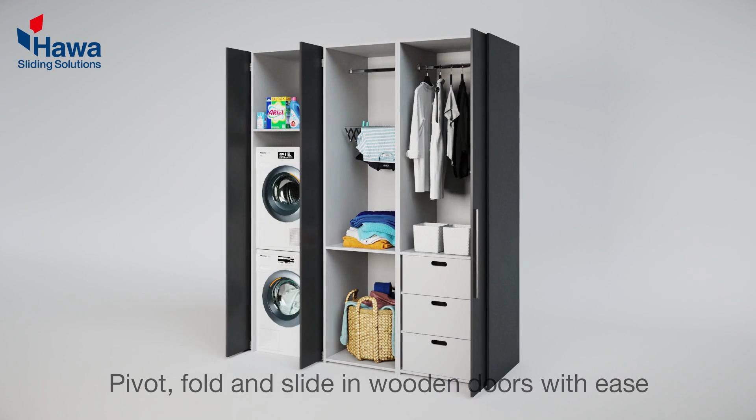Today, I'll provide an overview of the HAWA Concepta planning tool. Concepta is the flagship product from HAWA and comes in 4 options: Concepta 25, 30, 40 and 50. Concepta cabinets can be designed in 4 basic configurations, and you can use a number of different material types, and you can design for a wide range of installation heights, weights and cabinet depths.

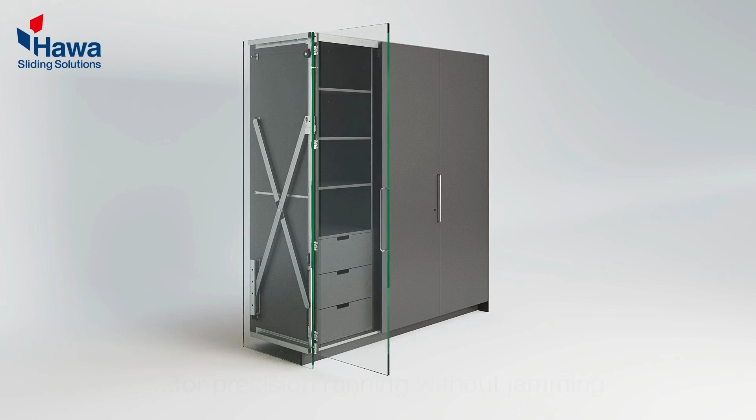The planning tool can help you to determine which version of the HAWA Concepta is suitable for your application, and it can assist you in calculating the cabinet dimensions, cut lengths for profiles and drilling locations for your project. It is internet-based and available in 3 languages: English, German and French.

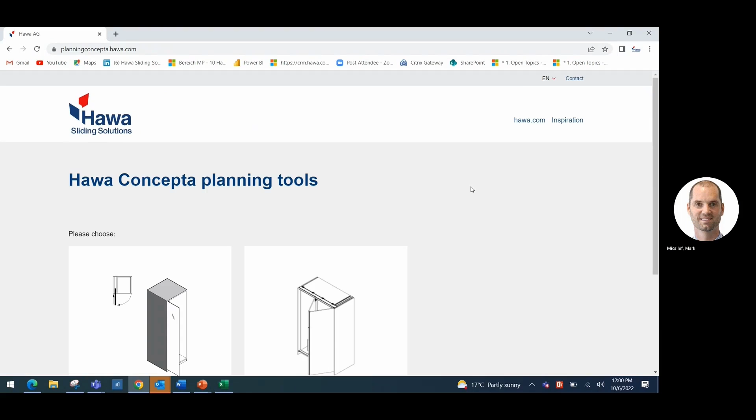To begin, open your browser to www.planningconcepta.hawa.com. The Start screen then displays 2 options: Concepta, which is the single door pivot and slide system from HAWA, and Folding Concepta, which is the folding and sliding system from HAWA. Today we will be focusing on planning a Concepta pivot and slide cabinet.

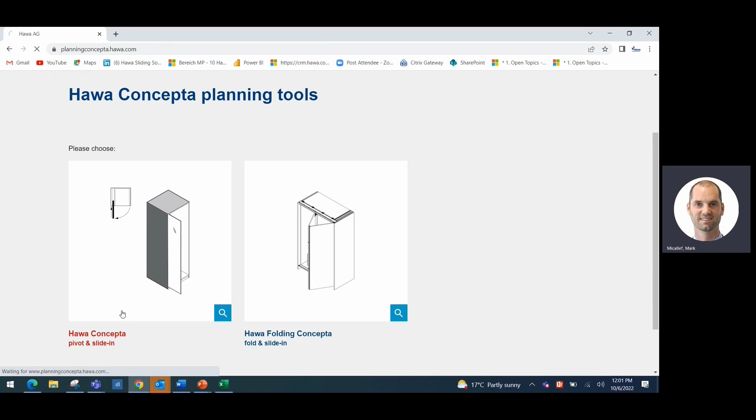When you select that icon, you will be directed to a new screen that asks if you are planning a Concepta with or without a soft close mechanism. HAWA upgraded all of its Concepta hinges to include soft closing capability back in 2020, and all new stock sold into Australia and New Zealand will have this new soft close hinge. If your product was purchased after November 2020, you will most likely have a soft close hinge as standard, but

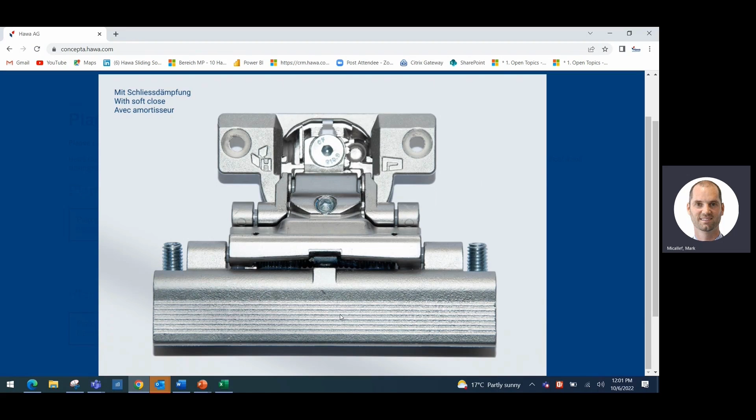if you're unsure, the magnifying glass adjacent to each of the options provides a picture of these hinges so that you can identify your exact hinge. Note that the soft close hinge contains these scribe lines on the outside of the hinge, whereas the non-soft closing version does not have those scribe lines. If you're still unsure, please contact your HAWA stockist to confirm.

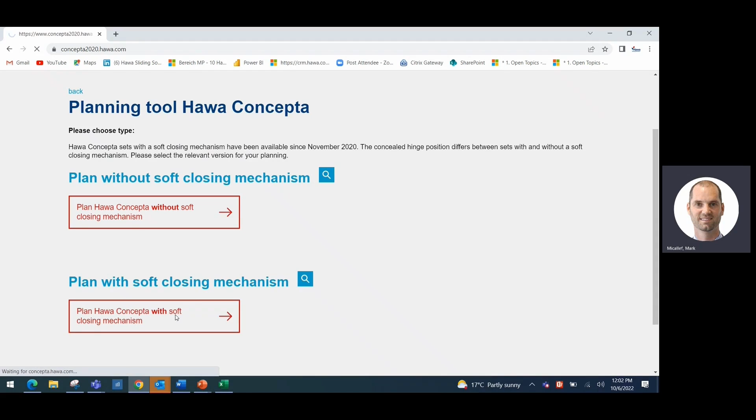By clicking on the Plan with HAWA soft close mechanism on the bottom of the screen, we are then directed to a new page which displays 4 basic installation options for the HAWA Concepta: inlaying doors, doors overlaying the top and the bottom of the cabinet, pairs of overlaying doors in one pocket, and doors integrated into a wall recess. By clicking on the magnifying glass, you'll get a picture of each of those options.

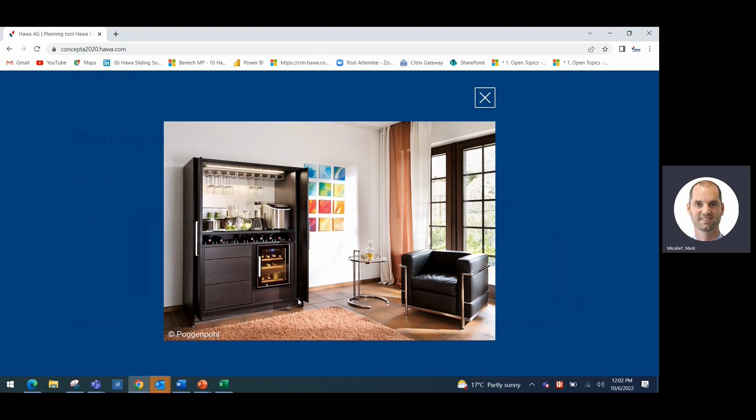For inlaying doors, you will have to build a pocket yourself, and the edge of the cabinet will be visible on all 4 sides. For doors overlaying the top and the bottom of the cabinet, with this option, you'll receive a special profile to help you to build the perfect pocket dimensions, and the top and the bottom of the doors will overlay and conceal the top and the bottom of the cabinet. This is our most popular option.

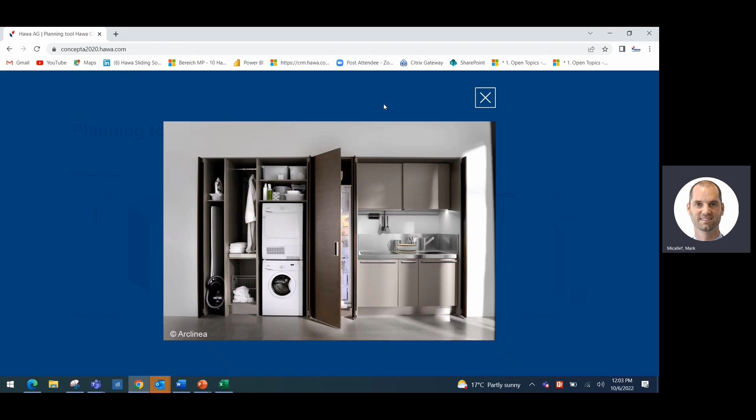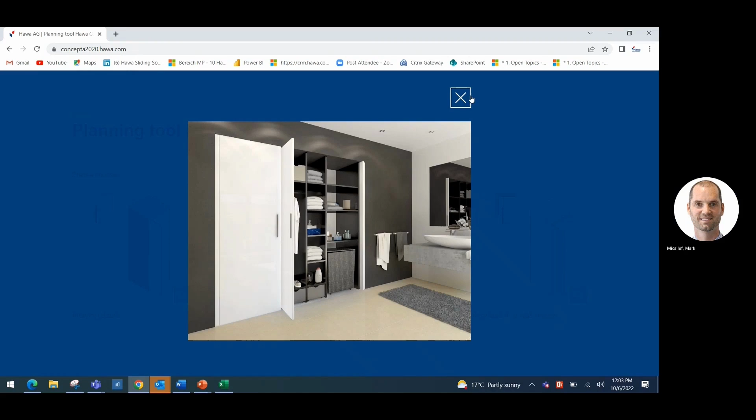For pairs of overlaying doors in one pocket, you'll get a special profile for multi-door cabinets. The special profile is double the width of the previous profile and allows you to create a pocket which fits 2 doors. And finally, doors with a wall recess. With this option, there is no need for a side profile because the Concepta cabinet is integrated into a wall recess. Select the most appropriate installation option for your project to get started. For this example, I'm going to show you how to design the overlaying doors.

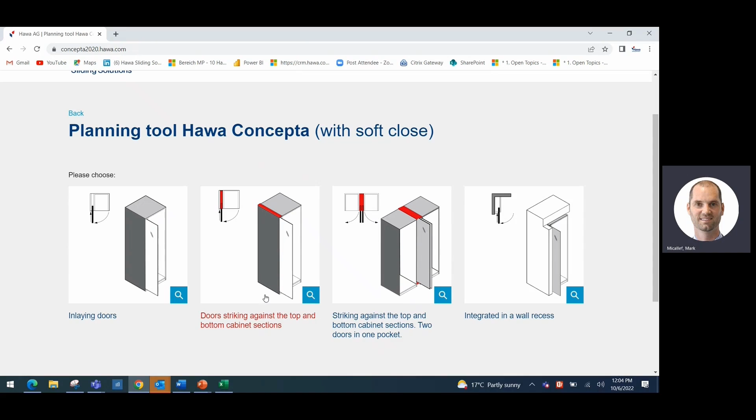On the next screen, you'll be prompted to enter the dimensions for the calculation of your cabinets. All measurements are metric by default. You can switch to imperial measurements by clicking on this icon on the top right hand side of your screen. Begin by entering your door material. This is necessary to calculate the weight of your doors. Note that the field which displays kilograms per metre cubed changes based on your selection.

Next, I'll enter the required dimensions. The minimum and maximum dimensions are shown in each field, and by selecting each field, the drawing on the right-hand side of the page highlights that dimension.

Let's begin by entering the dimensions. The installation height, then the door width, then the door thickness. Note that the door thickness field, the maximum door thickness is shown in millimetres. You'll also note that the minimum dimension is 18 millimetres. This dimension is suitable for 18mm thick MDF doors, which are very common in Australia and New Zealand. We'll enter a 25mm door thickness.

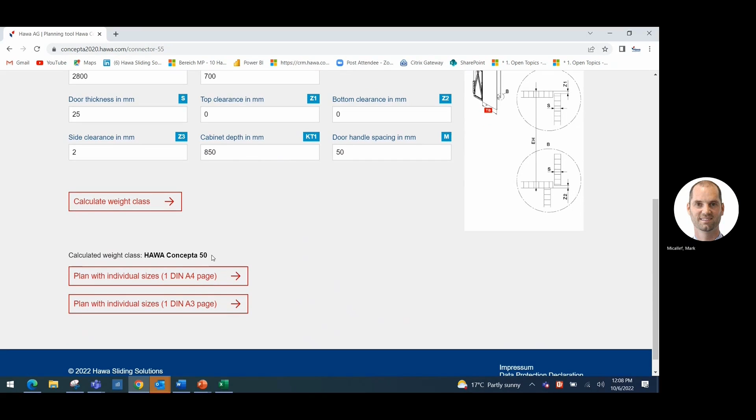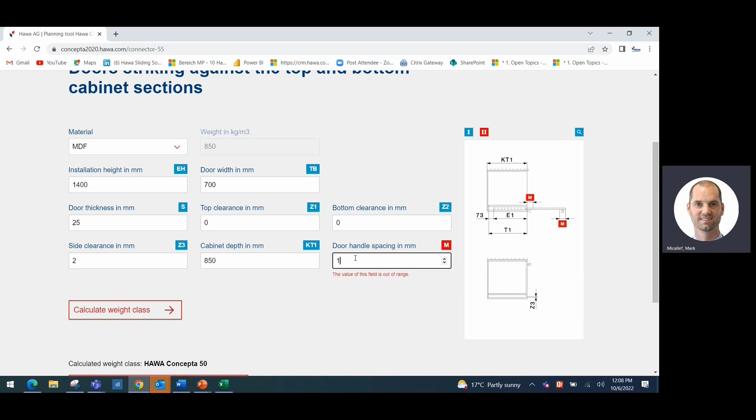Note also that there are some instances where the door weight might be within the weight limit, but will still not be accepted by the planning tool. This normally occurs with very short and wide doors, where the cantilever force exceeds the maximum allowable weight for the system. Let's simulate this by reducing that door height to 1400 with all of the same dimensions. We'll need to reduce or change the handle spacing. And even though we've reduced that height, which has reduced the door weight, no configuration is possible. And that's because the system exceeds the maximum allowable cantilever force.

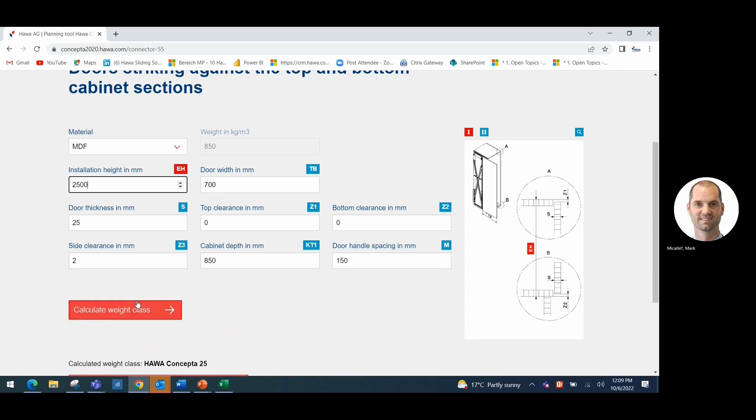There is a table in the instructions which provides more details on this. In these instances, though, it's necessary to reduce the weight of the doors to within acceptable limits by either reducing the width or thickness of the material type. Let's do that now. And that is suitable. Or you can retain those dimensions and increase the height of that system. So for our example here, the planning tool has recommended the use of a HAWA Concepta 40.

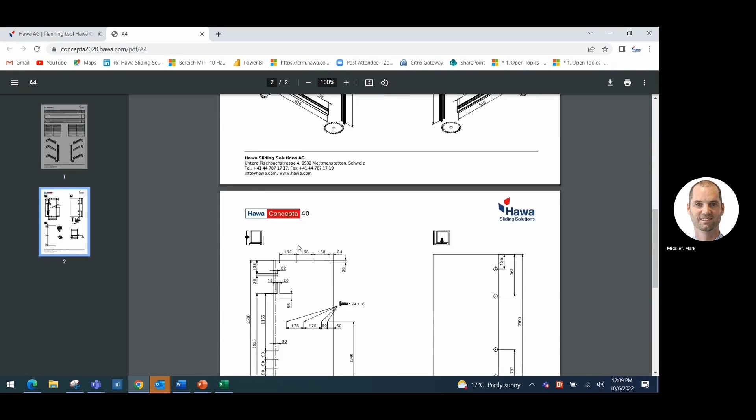Click on one of the Plan With Individual Sizes buttons, and it will provide you with a PDF with all of the calculations. DIN A4 will provide a file with calculations across 2 A4 pages, whereas DIN A3 will provide a file with all the info on one large A3 page.

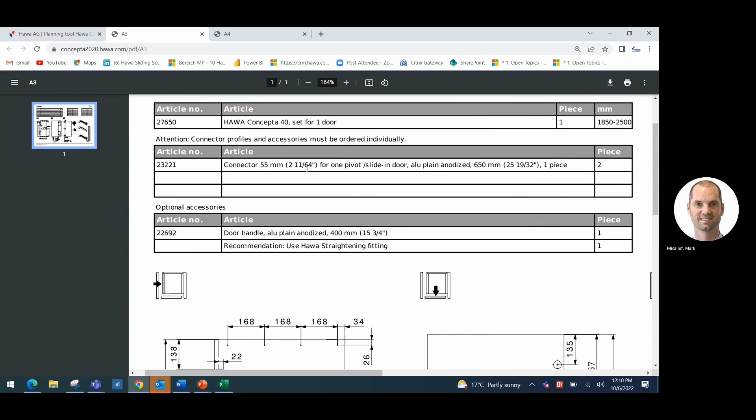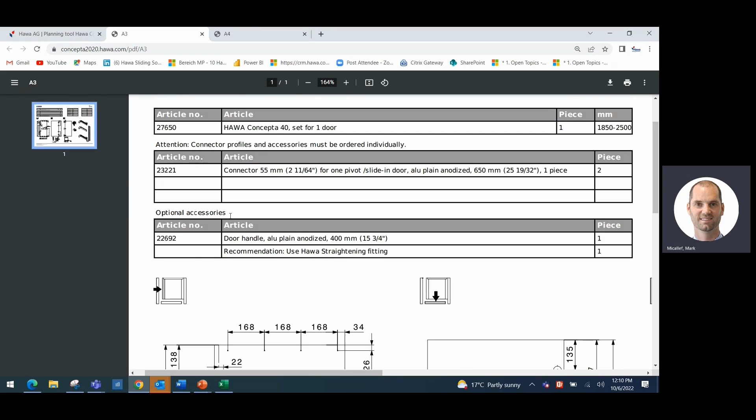Note that the output provides you with details of the article number that you require to order the Concepta, and also any accessory items, in this case, the connector to create the side pocket. It will also provide details of any optional extras, in this case a door handle, and we also recommend the use of a HAWA straightening fitting for the door to stop the doors from bowing.

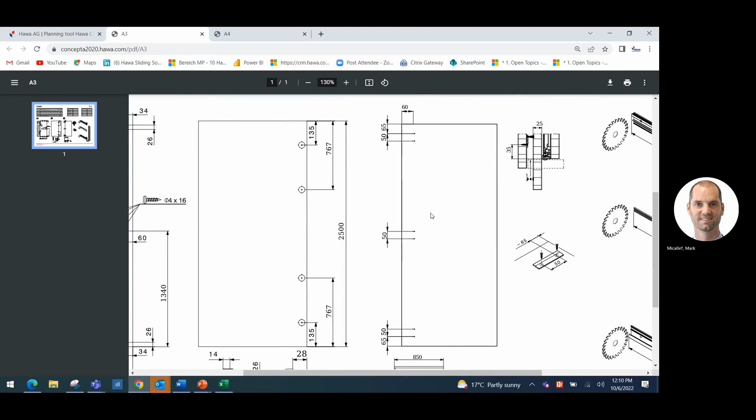The output also provides a full detailed list of the drilling dimensions for each panel, detailed instructions on how to drill the hinge positions, and also detailed descriptions of the cutting dimensions for the profiles. Okay, so that's a quick look at the HAWA Concepta planning tool.